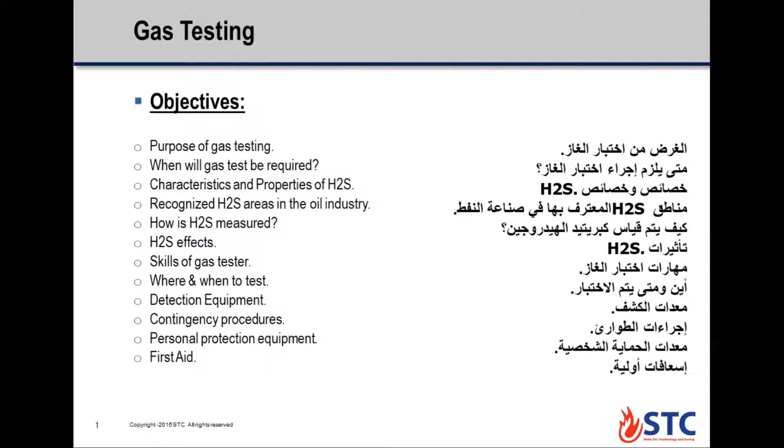What is a hazard chemical or chemical hazard? A hazard chemical is any chemical that can be harmful to your body. The effect a certain chemical has on the body depends on several factors: the physical form of the chemical and how the chemical enters the body, and the amount of the chemical that actually enters the body.

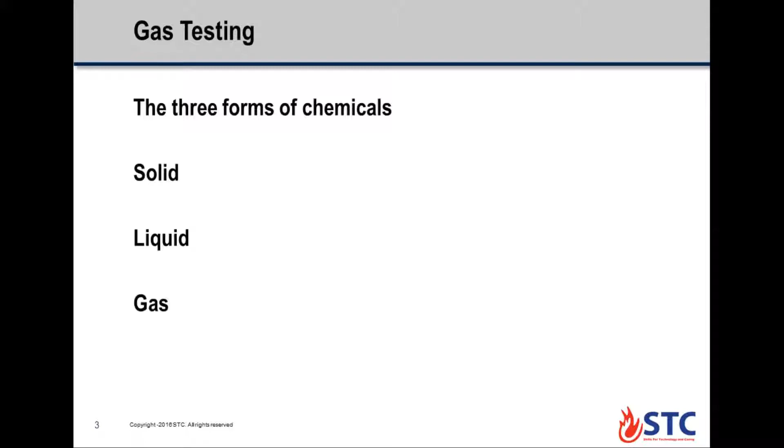And how toxic the chemical is. So the three forms of the chemical are: solid, liquid, and gas. Solids such as dust, powder, and fibers. Liquid can come into direct contact with the skin and be absorbed into the body. Also gas and vapor. Gases are chemicals that are in the gas phase at room temperature, and vapor evaporates from substances that are liquid or solid at room temperature.

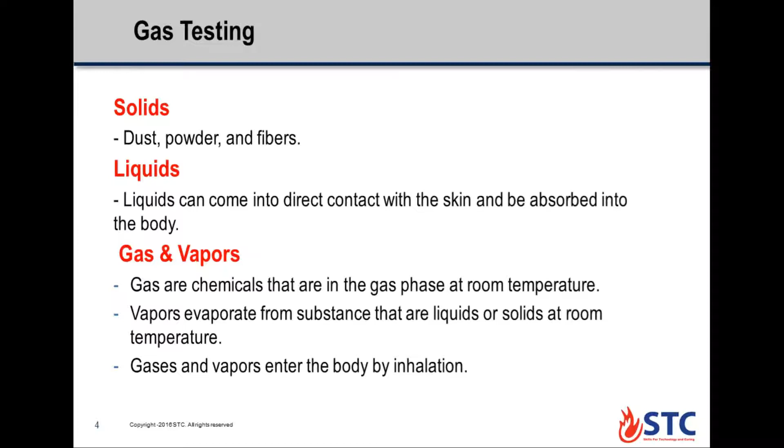Gases and vapors enter the body by inhalation. Can we get protected from hazardous chemicals? Use PPE and safety equipment, procedures and instructions, by the way. Protection from hazardous solid and liquid chemicals is by wearing suitable PPE and safety equipment.

Protective gloves and clothing, goggles, and respiratory mask, eyewash and emergency shower, washing and cleaning hands and skin. This is protection from hazardous solid and liquid chemicals. Use PPE and safety equipment.

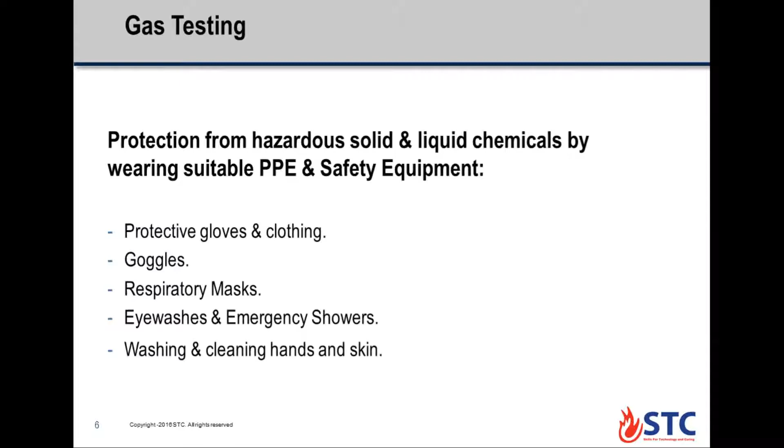Okay, protection from hazardous gases. We should use detection equipment. Gas detection equipment will not detect a solid, and gas detection equipment will not detect a liquid.

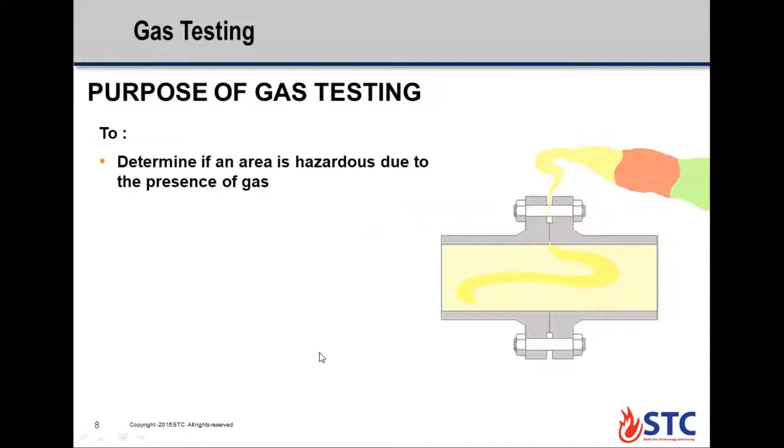The purpose of gas testing is to determine if an area is hazardous due to the presence of gas. Monitoring the hazardous area to ensure a safe workplace is provided, and determine the type of work that can take place in an area. Also determine any work site restrictions that may be necessary.

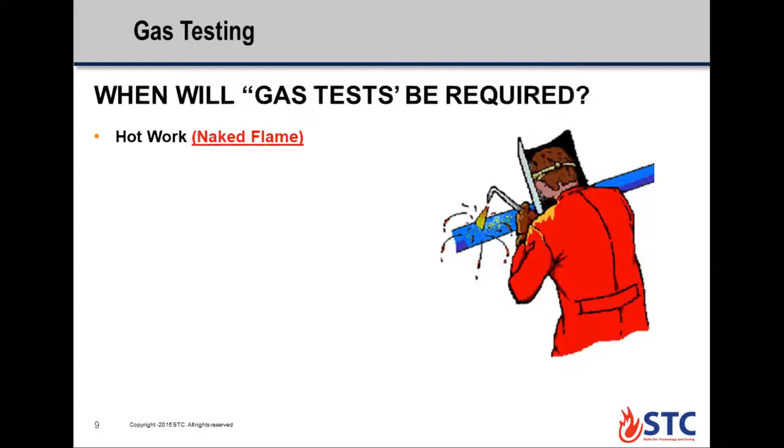When will gas testing be required? Hot work, flame, naked flames, welding and grinding, flame cutting, burning, use of heat guns, heat shrinking, blowing in hazardous area, use of equipment or work in pipeline or vessel contaminated with pyrophoric materials.

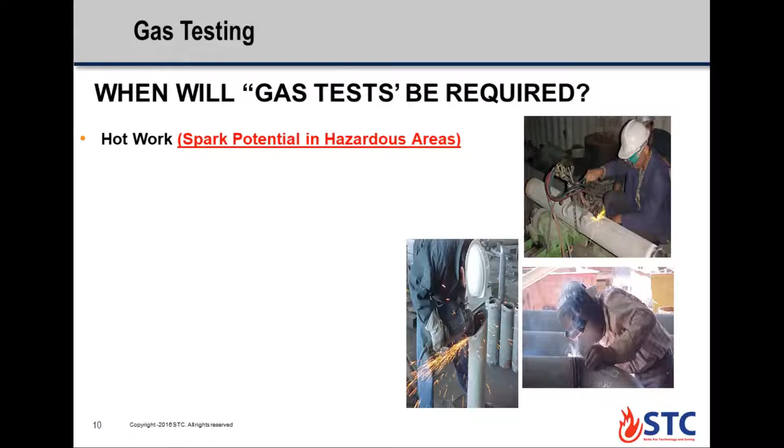When will gas testing be required? Also hot work, spark potential in hazardous area, use of normal electrical equipment, soldering, opening of junction boxes in hazardous area, and operation of tools capable of generating a spark, abrasive dry grit and shot blasting, portable diesel engines, and use of battery operation cameras.

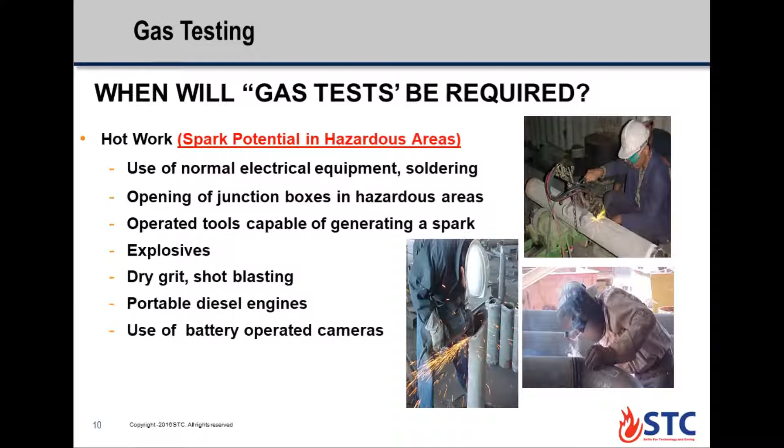There are many types of tests: flammable gas testing, hydrocarbon gas explosive testing. One, flammable gas testing, such as hydrocarbon gas which is explosive. Toxic or harmful gas test - toxic gases are dangerous to health, such as CO or H2S. And oxygen content test for deficiency or enrichment.

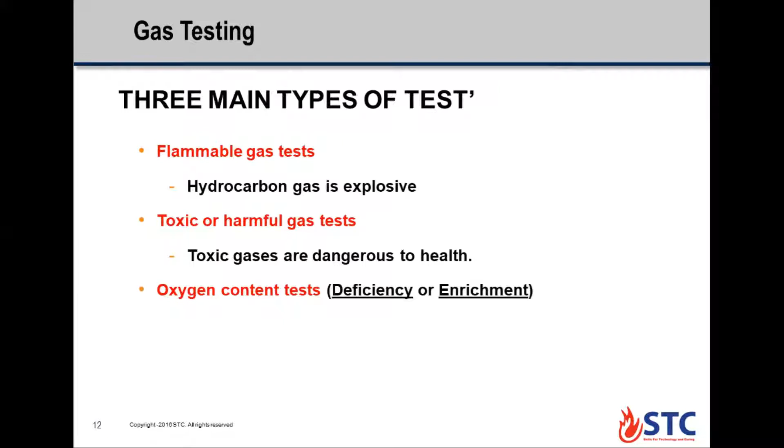The fire triangle is made up of air, fuel, and ignition. Air and fuel and ignition. Gas ignition requires gas in correct concentration, sufficient oxygen, and sufficient ignition energy.

Okay, we'll talk about the flammable unit of gas. LEL, this is lower explosive limit, the lowest concentration of gas that can ignite. This is LEL. Below this level, the mixture of gas and air is too lean.

And the other, upper explosive limit, UEL, is the highest concentration of gas that can ignite. Above this limit, the mixture of gas and air is too rich. Between these limits, gas is explosive, such as this is upper explosive limit, and this is lower explosive limit, and this is the explosive envelope.

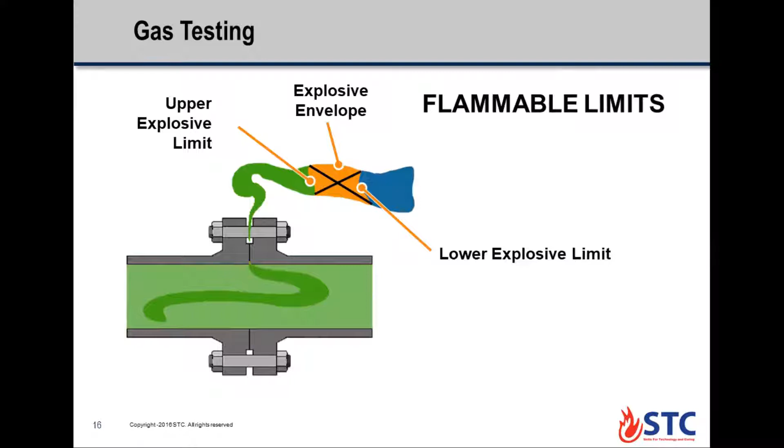Also, this picture shows the LEL and UEL.

All the combustible gases or vapors have different explosive ranges, such as this range for diesel, starting from 0.5% to 5%. Gasoline starts from 1.4 to 7.6, and methane starts LEL at 4.4 and UEL at 16.5.

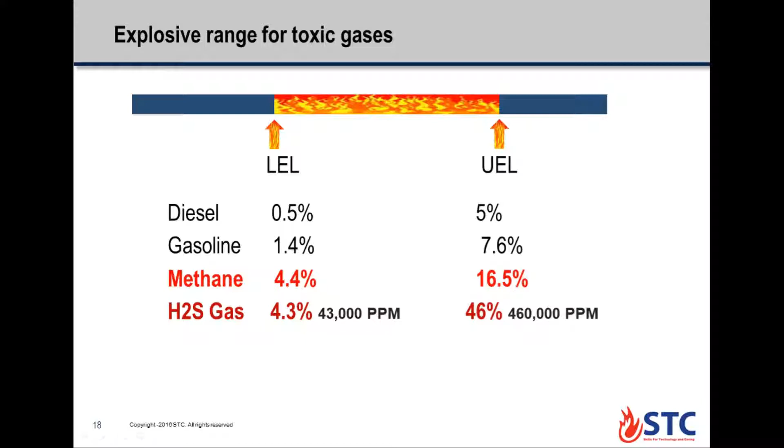H2S gas starts from 4.3 LEL. This ratio is at 43,000 ppm. To UEL at 46%, at 460,000 ppm.

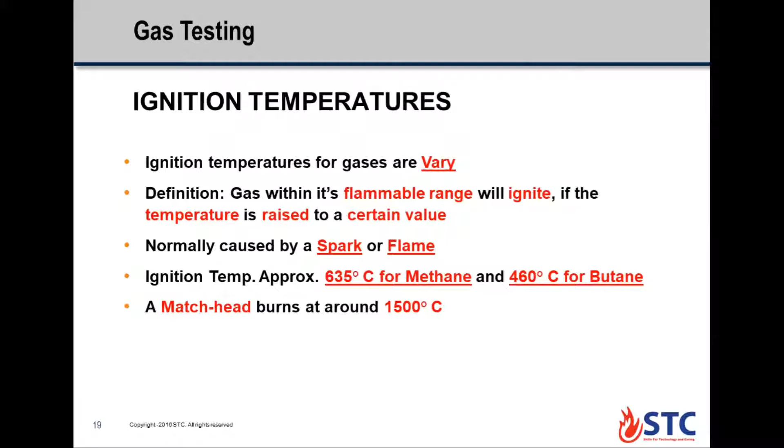Ignition temperature. The ignition temperature for gases varies. A flammable gas within its flammable range will ignite if the temperature rises to a certain value. Normal gases ignite by a spark or flame. Ignition temperature is 635 degrees for methane and 460 degrees for butane. A match head burns at around 1,500 degrees.

Auto ignition definition: a combustible material may ignite without a spark or flame, caused by heating or contact with a hot surface. This is known as the auto ignition temperature. It is important to be aware of areas where high temperatures are present.

Flammable gas testing.

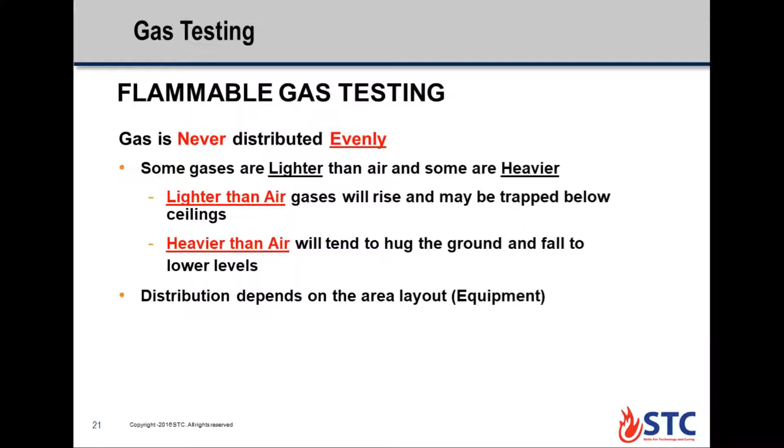Gas is never distributed evenly. Some gases are lighter than air and some are heavier. Lighter than air gases will rise and may be trapped below the ceiling. Heavier than air gases will tend to hug the ground and fall to the lower level. Distribution depends on the area layout, equipment, and atmosphere conditions must also be considered: temperature, wind speed, and direction.

For hot work, there should be no hydrocarbon gas present.

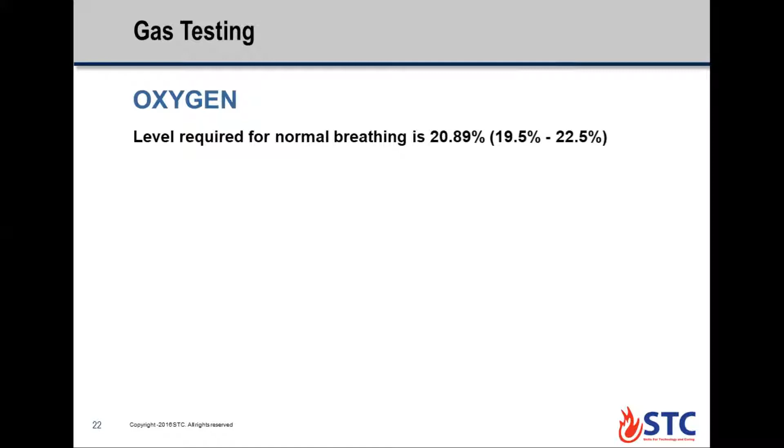Oxygen level required for normal breathing is 20.89%. The acceptable range is between 19.5% to 22.5%.

A low level of oxygen may be caused by rusting, welding, burning, or fire, displacement by another gas, chemicals, or vacuum.

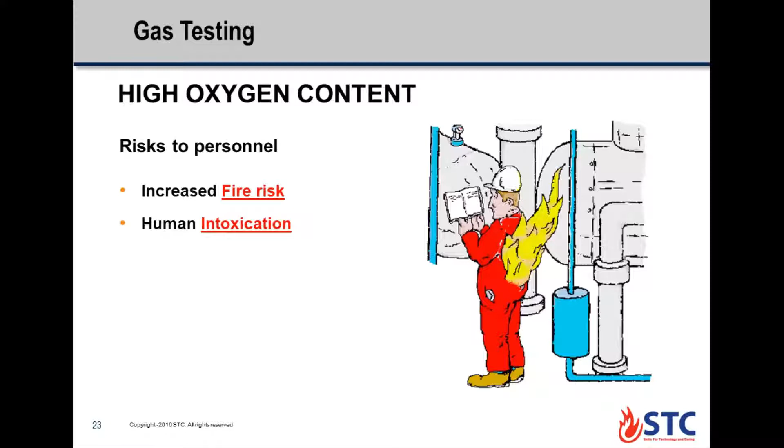A high level of oxygen can be caused by a leaking oxygen hose, acetylene, or chemicals. High oxygen content risks to personnel include increasing fire risk and human intoxication for the person.

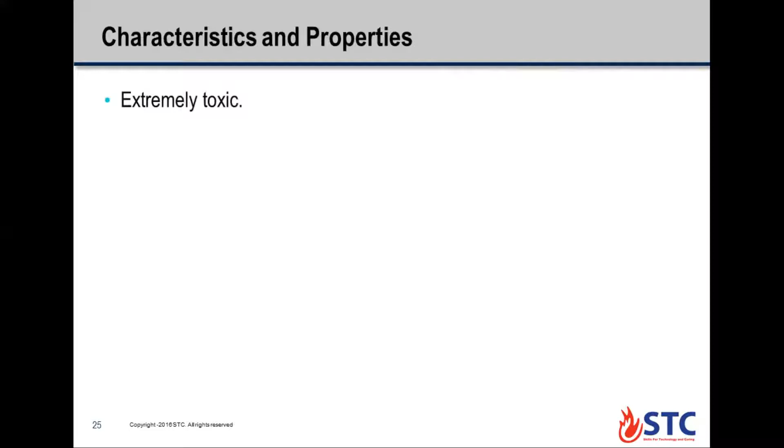I will talk about hydrogen sulfide, or H2S, and its characteristics and properties. It is extremely toxic and colorless, and smells like rotten eggs in small concentration, but has no smell in high concentration.

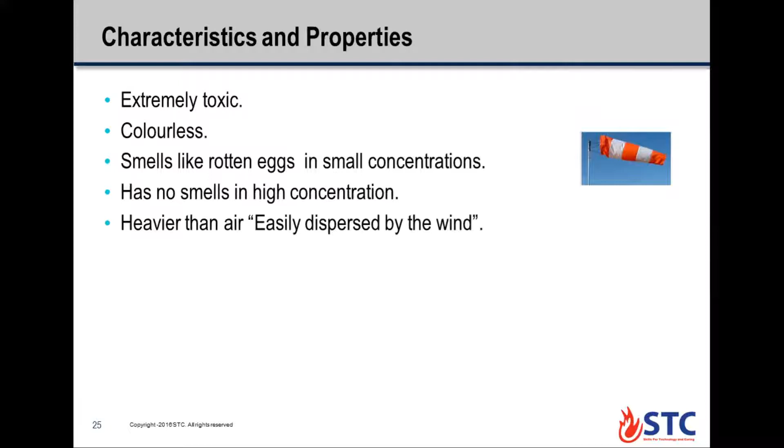H2S is heavier than air, easily dispersed by the wind, and flammable, igniting at 260 degrees. It is corrosive and can cause damage to steel and other materials, and is soluble in water and oil.

Toxicity: the toxicity of the gas was responsible for the death of 26 men in Wyoming and West Texas between 1974 and 1976. In Saudi Arabia, 19 people were killed in one incident due to H2S poisoning in 1980.

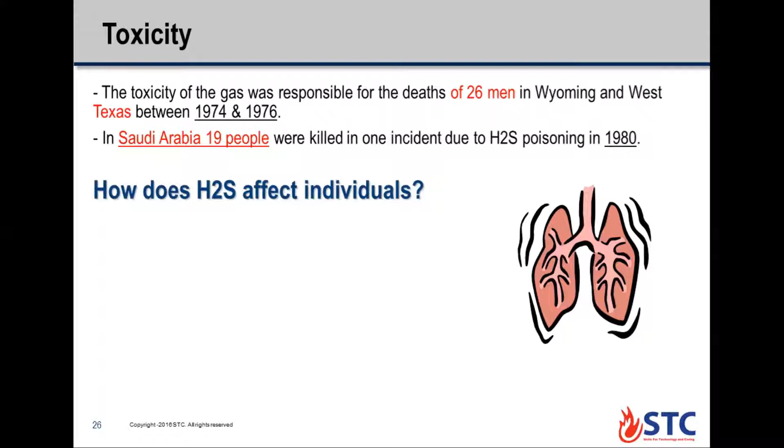How does H2S affect an individual? Breathing cycle: H2S goes to the lungs and into the bloodstream and gets dissolved in the system. The body's defense system normally oxidizes and breaks down H2S as rapidly as possible into a harmless compound. With higher doses of H2S, the body's defense system will weaken, H2S builds up in the blood, and the individual becomes poisoned.

Also characteristics and properties: how is it formed? H2S is formed during the decay of organic matter.

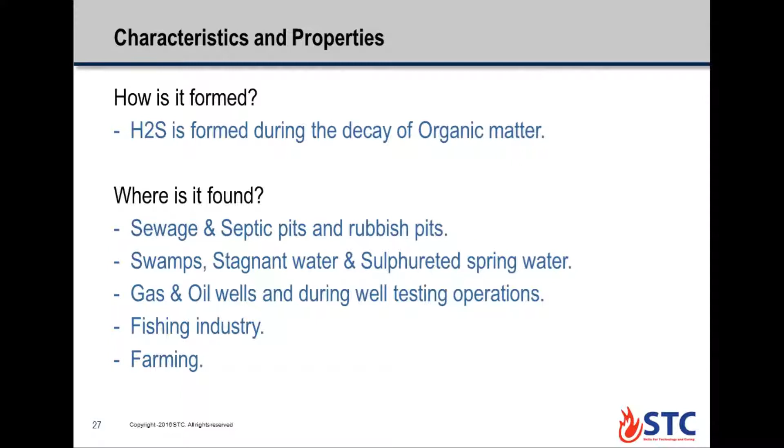Where is it found? H2S may be found in sewage, septic, and rubbish pits, swamps, stagnant water, sulphureted spring water, gas and oil wells, during well testing operations, the fishing industry, and farming.

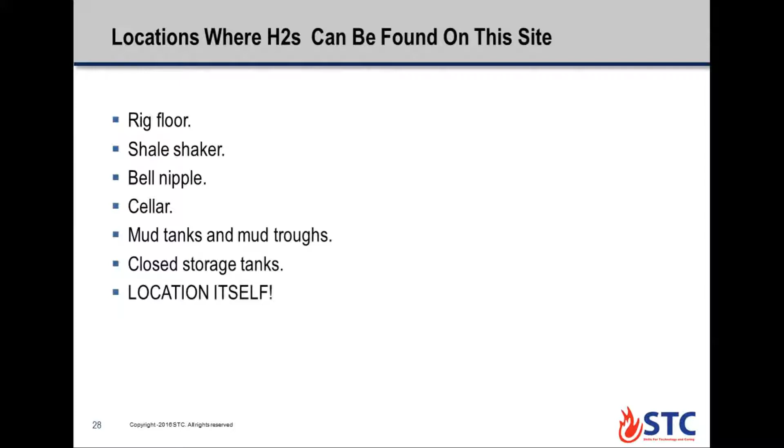Locations where H2S can be found on site include the rig floor, shale shaker, bell nipple, and cellar, mud tank and mud trough, and closed storage tank location itself.

H2S measurement in ppm - this is the difference between 1 millimeter and 1 kilometer. 1 ppm equals 0.0001%, 20 ppm equals 0.002%, and 1000 ppm equals 0.1%.

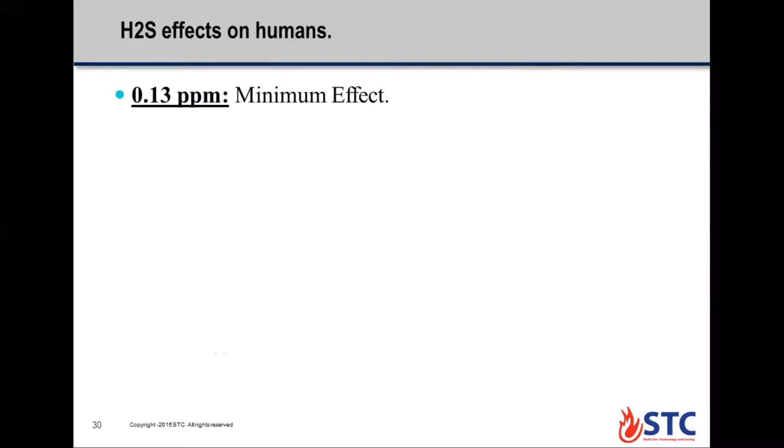H2S effects on humans: at 0.13 ppm, minimum effect. At 10 ppm, beginning irritation. At 100 ppm, loss of sense of smell, coughing. At 500 to 700 ppm, loss of consciousness and possibly death within an hour or some minutes. At 700 to 1000 ppm, quick unconsciousness, respiratory paralysis, death occurs almost at once. Above 1000 ppm, immediate unconsciousness and death.

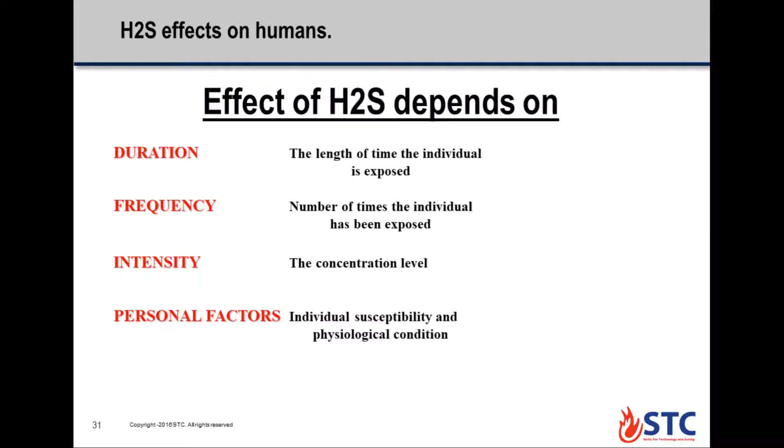Effects of H2S depend on duration - the length of time the individual is exposed - and frequency - the number of times the individual has been exposed - and intensity, the concentration level, and personal factors such as individual susceptibility and physiological condition.

Also, time-weighted average (TWA) refers to the concentration of H2S and SO2 in air, measured over a time period of 8 hours. The TWA for H2S is 10 ppm for an 8 hour work period.

Short-term exposure limit, STEL, is the maximum concentration permitted for a short period of time, at 15 minutes.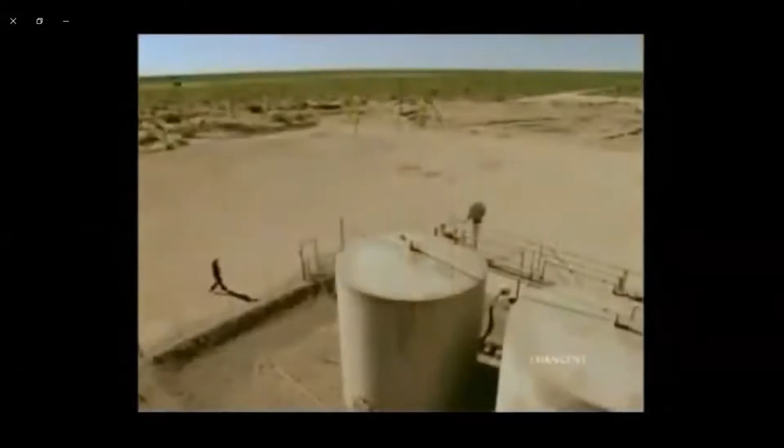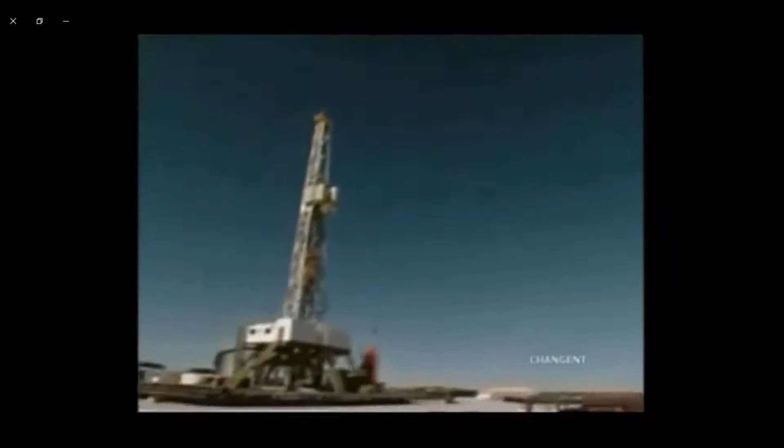Sorry. Sorry about this, but it's not showing. Sorry about this, because the internet is not showing this screen for the Zoom screen.

Okay, now let's complete the course.

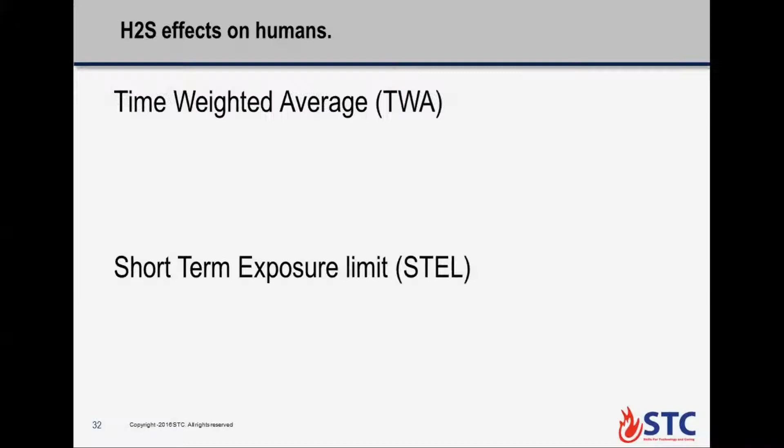Other harmful gases: benzene, found in some hydrocarbon systems; carbon monoxide, found in exhaust flows; carbon dioxide, used as a gas blanket on storage tanks and in firefighting; nitrogen, an inert gas used for purging and blanketing, and others. Also chlorine, found in water systems, and hydrogen, emitted by battery systems.

Never depend on your sense of smell to detect gas.

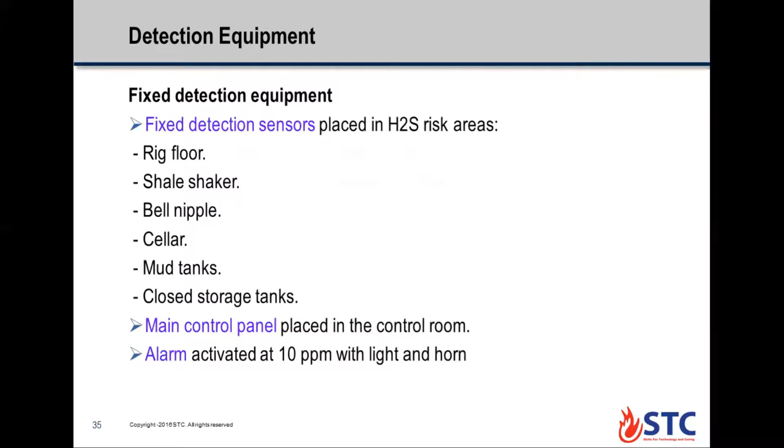Fixed detection equipment: fixed detection sensors placed in H2S risk areas, such as the rig floor, shale shaker, bell nipple, and cellar, mud tank, and closed storage tank. The main control panel is placed in the control room. The alarm is activated at 10 ppm with light and horn. We'll show in a video how this device works.

Multi-gas detection equipment: a pump draws a sample from the air, with a loud audio alarm for noisy work areas at 55 decibels, and can have as many as 5 sensors installed.

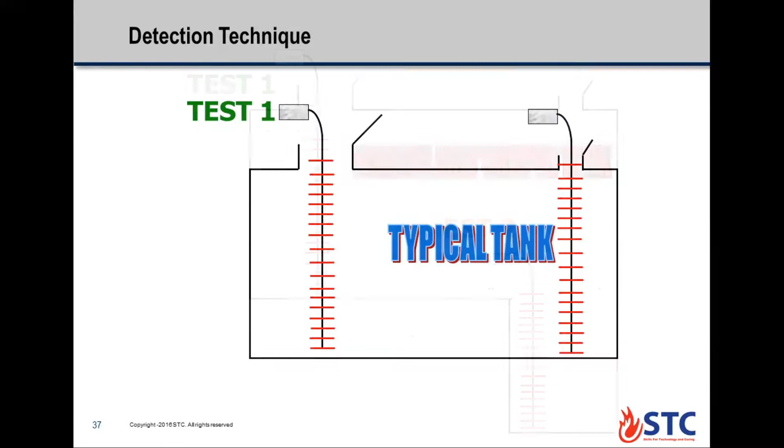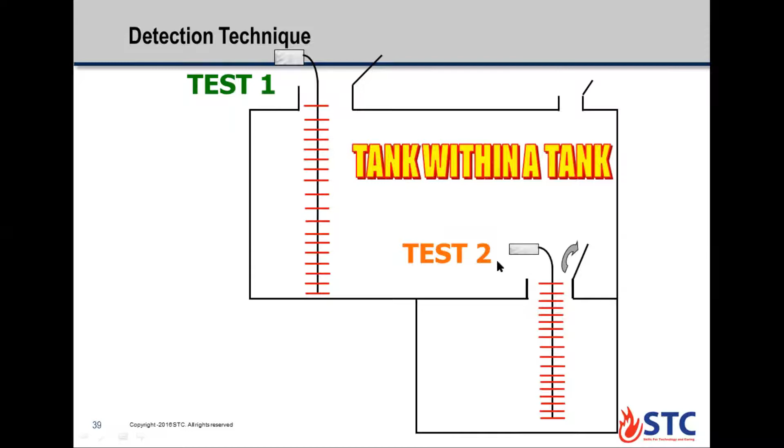A tank within a tank entry also requires 2 tests, test 1 and test 2. This tank, by design, is not well ventilated, so you must do 4 tests: test 1, test 2, test 3, and test 4. Okay, now we will also show a video of how to make the test.

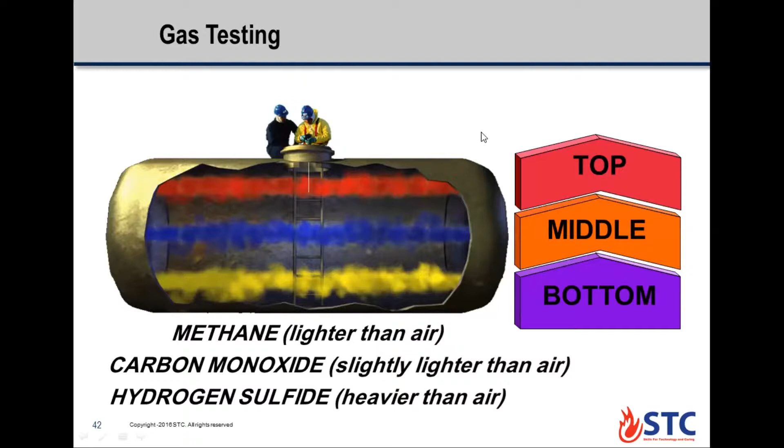Okay, gas testing with chemical tube. Used to test various gases, common systems are Draeger and the Kitagawa pump, such as shown in this picture, this Draeger and this Kitagawa pump.

Gas sample is sucked into the tube containing chemicals by pump or bellows. Chemical changes color depending on gas concentration.

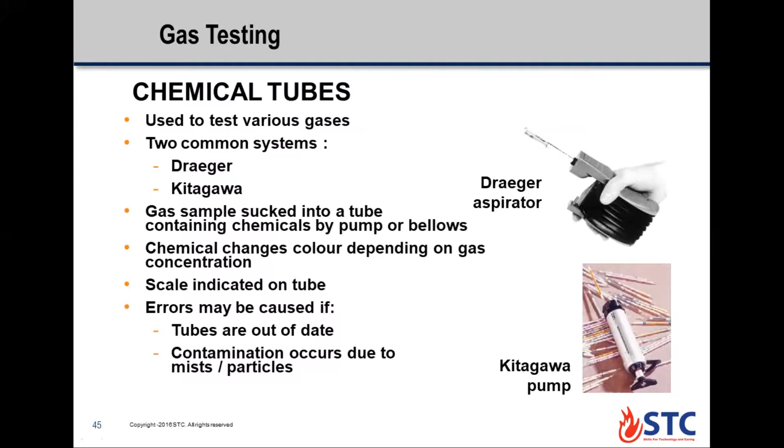Scale is indicated on the tube. Error may be caused if tube is out of date, and contamination occurs due to mist particles.

Also must ensure the equipment used is suitable for the atmosphere to be tested, and is approved, properly calibrated, and maintained within its validation period.

Okay, sorry, we need, I think, 10 minutes to complete this course.

Basic instrument checks: read the manufacturer's instructions, know the instrument limitations, check the general condition of the meter.

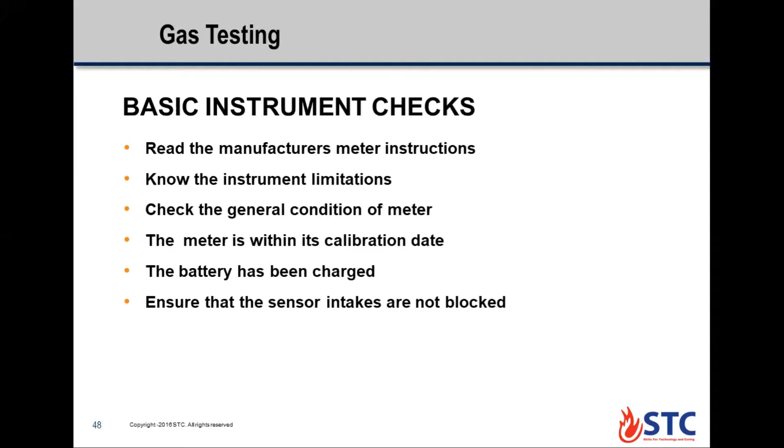The meter is within the calibration date, and the battery has been charged, and ensure that the sensor intakes are not blocked.

Basic instrument check: switch on the meter and check the reading in normal air. Meter should show oxygen at 20.9%,

hydrocarbon 0 LEL, hydrogen sulfide 0 ppm, and carbon monoxide 0 ppm.

Zero the meter in normal air, and if there is any deviation, meter function and alarm may be checked with the test gas prior to use.

Where to test? Areas to check on equipment include the following: behind weir plates or barriers in vessels, pipe flanges, vents and drains, loop seals leading to the drain system, screwed fittings, valve packing, and pump seals.

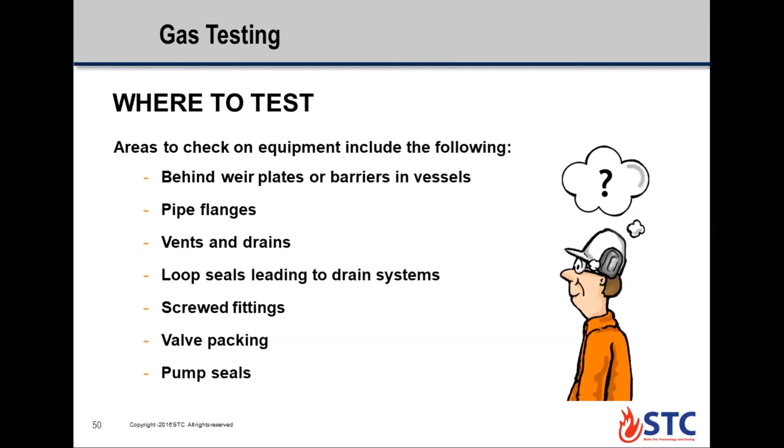Also, you must record the result on the permit. We record the test result.

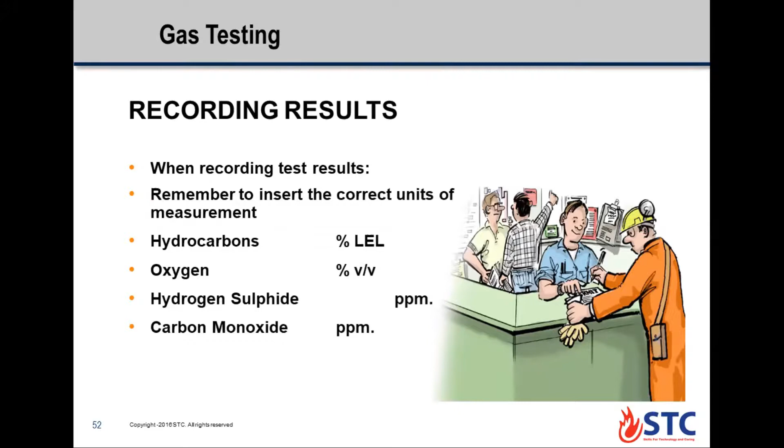Remember to insert the correct unit of measurement: hydrocarbon in LEL, oxygen in % v/v, hydrogen sulfide in ppm, and carbon monoxide in ppm.

Contingency procedure: must immediately put on your mask and escape from the area as quickly as possible. Locate the wind indicator and go upwind.

Never assume the shortest route is the safest route. Always use the safest route, following instructions, and know your role in the evacuation.

This is personal protection equipment used when there is a high concentration of toxic gas.

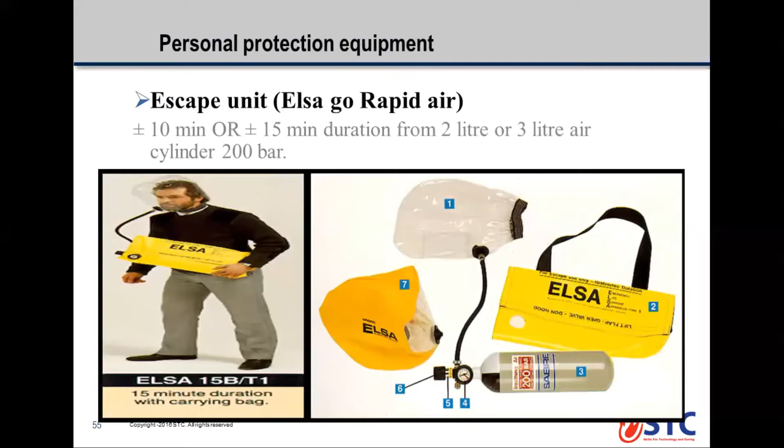How can you measure time for the air bottle? Normal air used is at 40 liters per minute per person.

Example, if we have a bottle as follows: 6 liter multiplied by 200 bar equals 1,200 volume.

So, 1,200 volume divided by 40 equals 30 minutes. Divide this by that equals the time for the cylinder.

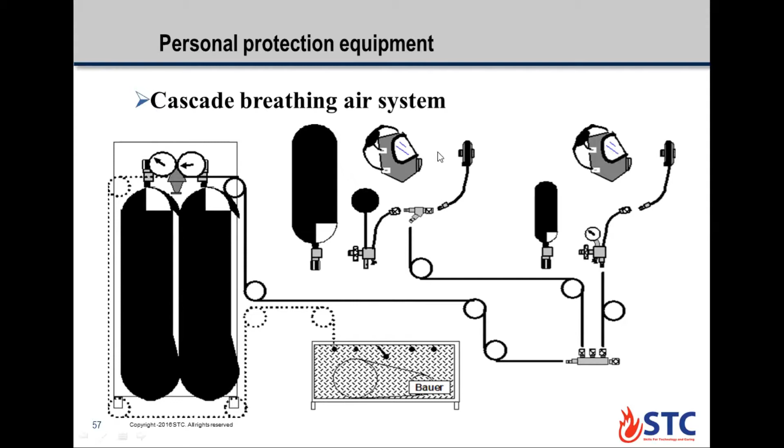This shows the cascade breathing air system.

Okay, now let's talk about first aid. The most important factor of first aid in an H2S environment: self-protection, self-protection.

Always use breathing apparatus when entering an H2S contaminated area.

And second, fatalities do occur when trying to rescue a fallen H2S victim, one breath can be enough to render the rescuer unconscious. When rescuing an H2S victim, it is vital the exposed personnel receive fresh air as soon as possible.

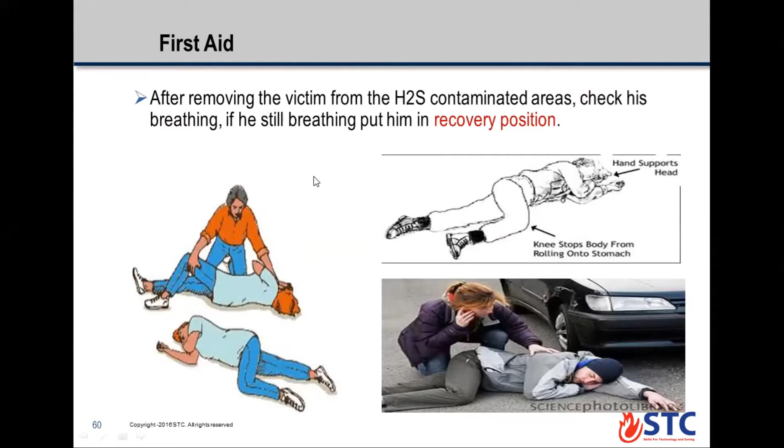I think learning how to do CPR is covered in first aid courses.

Okay, now before we finish, just watch this video. Show this video. After that, finish.